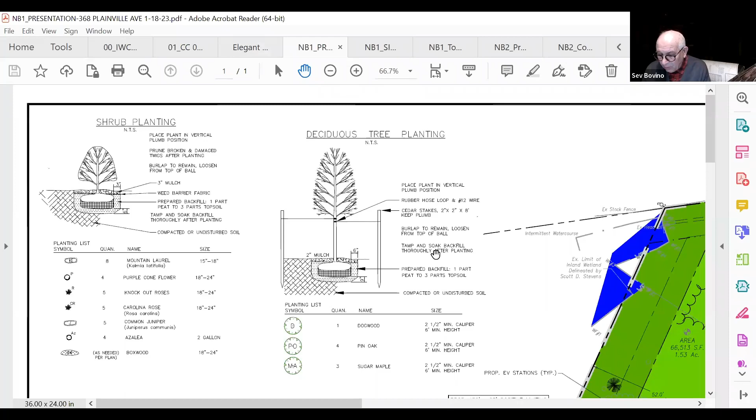Our proposed system takes the roof water from the building to the southwest corner of the detention area. The canopy drainage is directed to the southeast corner of the detention area. The pavement is pitched to allow sheet runoff to the south edge of the detention area, where a trench drain brings the flow to a Stormceptor. From the Stormceptor, the runoff is discharged into a sediment forebay with a stone berm. The runoff goes through the stone berm to the bottom of the detention area, which is about 1 foot deep at elevation 316.6. The spillway elevation is 317.5, and the top of the berm is 318.7.

So as you can see, it's a very shallow system. The runoff moves along the bottom of the detention area, which is covered with grass, a wetlands mix type of grass, to a control structure, the invert of which is 314. From there it drains to a flared end with a riprap energy dissipator, and eventually to the existing discharge point over a grass area for about 45 feet from the end of the riprap area.

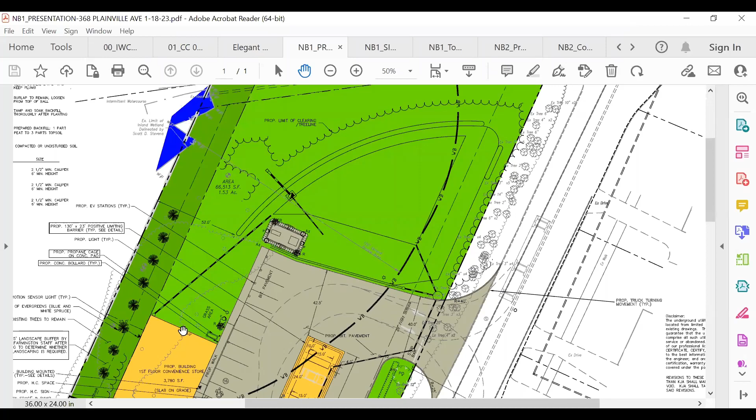From this flared end, we have an energy dissipator riprap area. From here to the edge of the wetlands is about 45 feet, and this is a grassed area, which is where the runoff eventually will end up. At the end of the existing 36-inch pipe here, we are proposing riprap intermediate as recommended by the commission at the last meeting, when the commission saw the condition of the pipe at the end of that pipe.

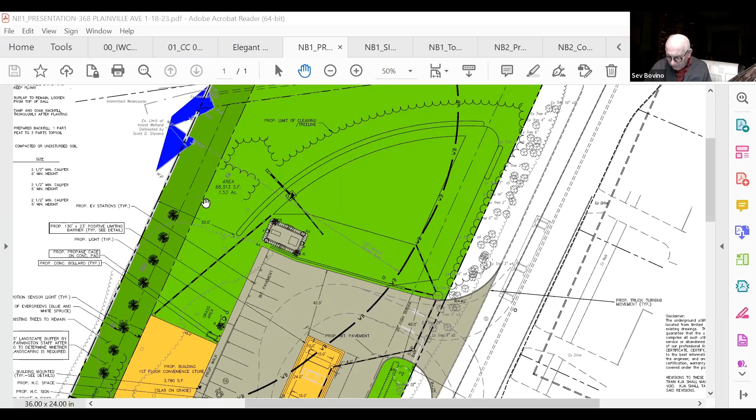At the meeting with DEP and Arcadis, it was confirmed that this does not create a problem, as the attorney Ziogas indicated, because the pollutants are south and southwest of this area, and the groundwater is most likely about 11 feet deep. The detention area is designed to hold storm events from the 2-year all the way up to and including the 100-year storm. All the notes and details are on the plan in terms of erosion controls, and notes regarding meetings to take place prior to any work being done on this property, and so forth.

So at this point, if you have any questions, I'll be glad to answer.

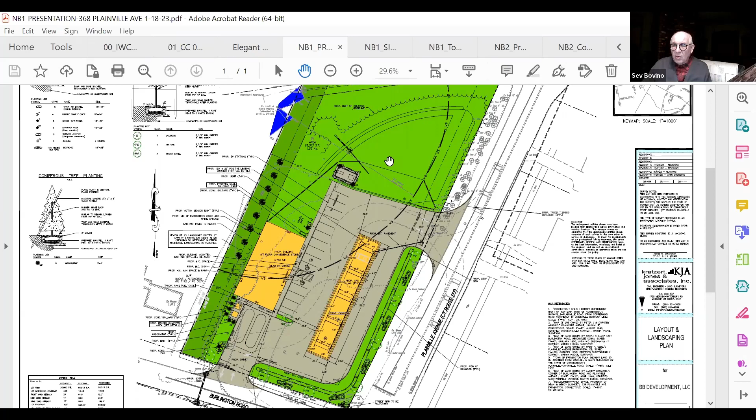Before I ask commission members, Ms. McManus, did you have anything that you wanted to add today too?

Good evening, Mr. Chair and Commissioners. No, I think Sev kind of took the floor tonight, unless you have any particular questions you'd like to ask. No, I just figured you started talking earlier, so I just asked you.

No, I don't see everybody on my screen, so I was hoping somebody was there for the applicant. So I got anxious, sorry.

All right, Ned, I'll start with you tonight. Any questions, comments, concerns? I wasn't sure how to, so most of this water is going to drain, the pavement is going to drain towards the north end of the lot, and you have this trench drain. Now, does the water go in that and then just go into the ground there, or does that connect up to the other system somehow?

It connects to the Stormceptor. Right, but then it looks like it's connected up to a pipe, so I wasn't sure which way this thing is draining. It's draining from the east to the west via trench first, then via pipe to the Stormceptor, and then out via pipe to the forebay in this area. So it drains through the trench itself, and what can't drain through the trench goes into that pipe and into the collector, into the forebay, then through the forebay stone berm, out to the control structure on the west side of the detention area, and then out to the energy dissipator to the west.

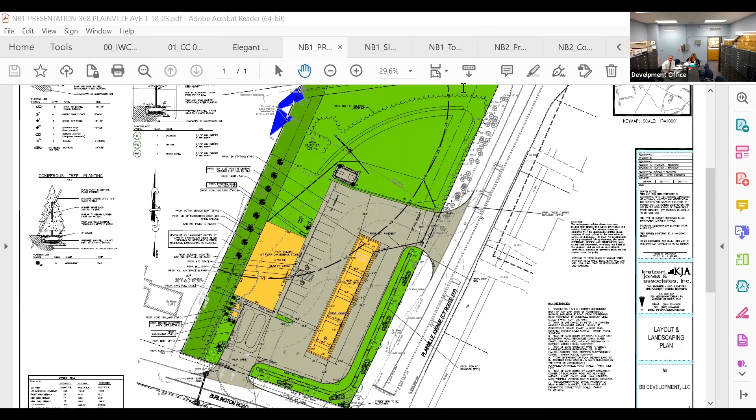The next item on the agenda is Bulwark LLC, lots 8120 and 8122 Colt Highway.

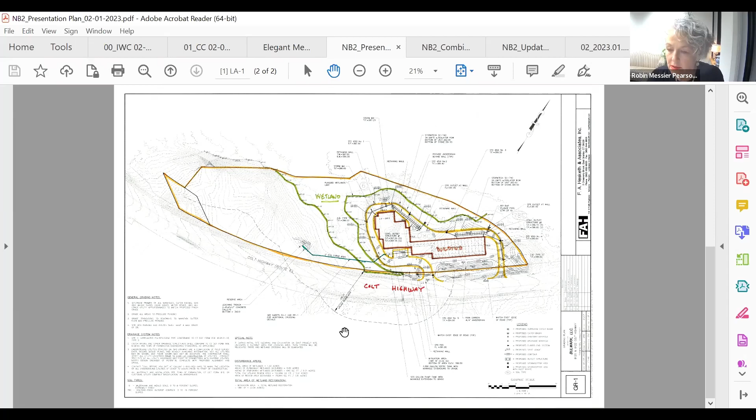Good evening, Mr. Chairman. Robin Pearson, here on behalf of the applicant, Bulwark LLC, requesting a permit to conduct regulated activities at the site. As this commission recalls, on October 19th of last year you denied an application for the same property requesting a wetland crossing that would have directly impacted the wetlands, allowing access so both sides of the site could be developed for a self-storage facility. On the eastern side, the larger of the four proposed buildings, about 59,000 square feet, was requested. The commission felt the applicant had not analyzed prudent and feasible alternatives to a degree that could give you comfort in a favorable review.

On the western side of the site, necessitating the connecting driveway crossing to avoid a second access on Route 6, three additional storage buildings were proposed. You therefore denied it and asked us to look at possible alternatives. In your denial letter, you asked us to look at five alternatives that would cause less or no environmental impact to the wetlands, and specified that one, more than one, or all of them might be followed to come up with a plan making you more comfortable and allowing a positive decision.

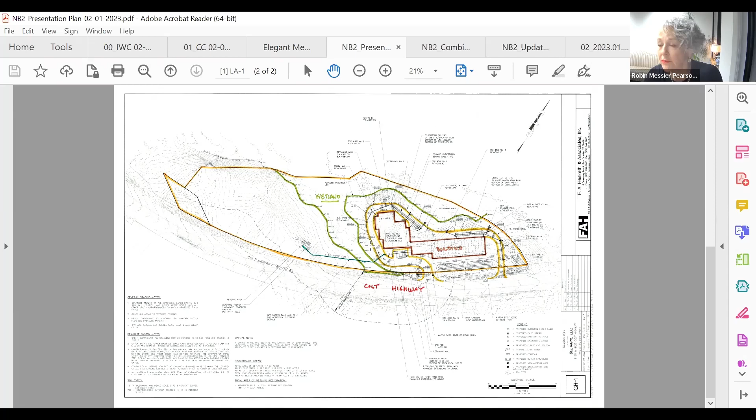And both item 4 and item 5 are really no longer relevant given the significant change we have made in totally redoing the plan to eliminate all the development on the western side and concentrating it on the eastern side in the single building that is now a little bit taller, but certainly in terms of its footprint and the impacts on wetlands, there has been a major reduction.

With me this evening is Dave Ziaks, who has designed the new layout for you, and also Anthony Zemba with Land Tech, who is our certified ecologist and soil scientist. He's also provided you with an updated impact assessment for your consideration. And because we are proposing the potential for a temporary disturbance, but I'm not going to get into the details of that, I'd like to turn it all over to both of those gentlemen to go through the specifics of the application.

And I think it's very clear that we heard what you had to say, and we worked very hard, and it took a while to be able to make it work, but we've come back with a plan that satisfies your concerns. So with that, David?

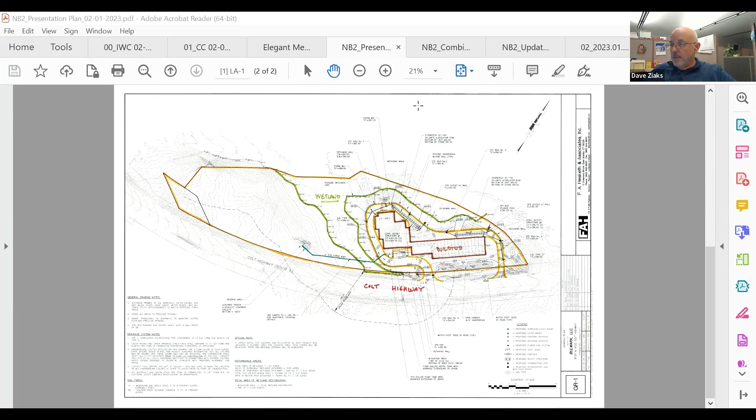The green line on this colored rendering is the wetlands limit that we've all had a chance to review and see in the field. It's about 1.02 acres of the overall 4.99 acres of the total site. It has a high point in the middle of the site where it tends to drain to the north in the northerly section, and then parts of it in the south end drain towards the 36-inch drainage culvert that goes under Colt Highway, which is a DOT drainage culvert. Most of the property falls within the 150-foot upland review area, so 3.51 acres of the 4.99 acres is within the regulated upland review area.

As Robin pointed out, we spent a great deal of time since we last met with you folks on the idea of converting the building that was previously proposed as 3 stories to possibly 4 stories. That has lots of challenges as far as building codes and zoning codes and things of that nature, and that's what we spent the last 90 days reviewing. The applicant has exhausted that and feels comfortable that they can build a 4-story building within the footprint that we previously proposed and still have an economically viable project.

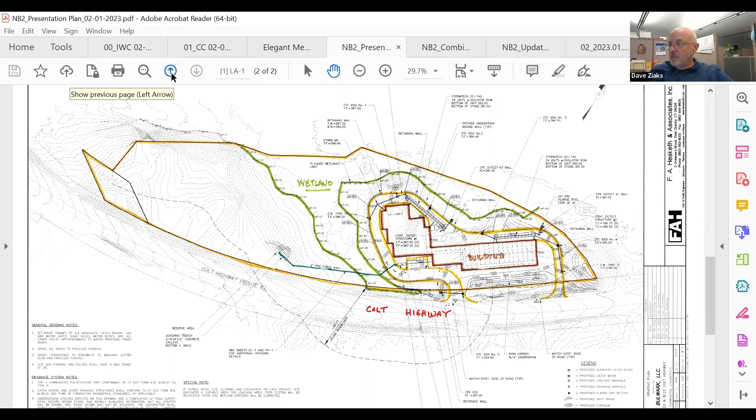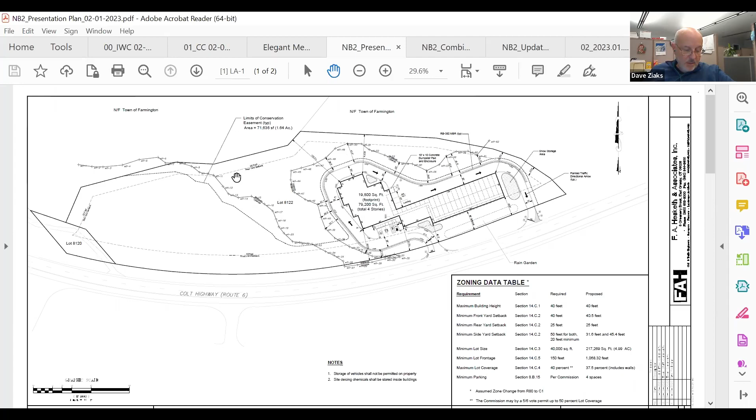So really, in summing it up, we've listened to what you had to say. It took a long time to convince ourselves that we could do it. And we've come up with a project that is economically viable for the applicant, concentrating on the east side, not the west side. We will be designating pretty much the same limits of a conservation easement incorporated in the plan that will obviously prevent any further encroachment towards the wetlands, and also ties in nicely with the town of Farmington's open space, which is all to the north, that we explored last time.

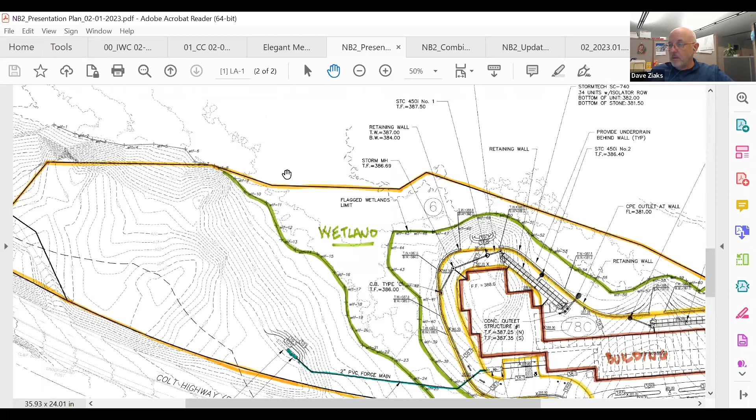I thought maybe we have Anthony say a few words, our soil scientist and wetlands expert. He provided, I think it's a 2-page updated letter to you folks that's now on the record, of his observations with the changes to the plans. Anthony?

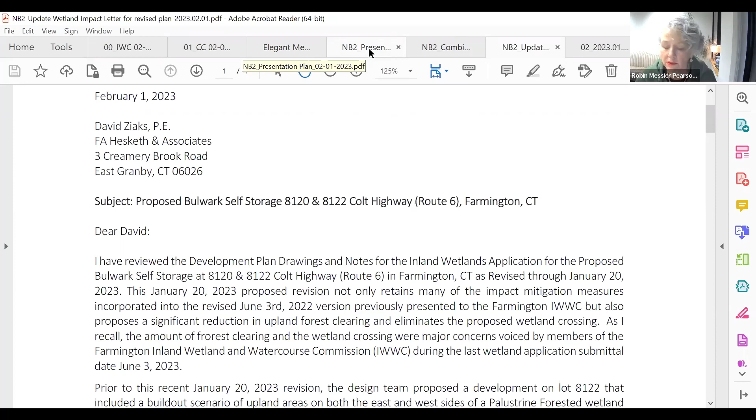The only thing I would like to say is that we don't think under the circumstances that there's really a need to hold another public hearing on this. You've already done a site walk. There was very little public concern about this. There was no public concern about the particular proposal.

And I think, Anthony, your update is very thorough. It was your opinion previously, and I gather it's fair to say that your opinion is even strengthened more by the current changes, that this will not have a negative impact on the wetland resources as currently designed. Correct. Thank you.

Okay, thank you. That's it, Mr. Chairman. Obviously you can't decide it tonight because you're receiving it, but I guess we just would request that we proceed to the next meeting without the need for having a public hearing. Okay, well, we will discuss it tonight so everybody will have a good idea. So Rich, I'll start with you. Any comments, questions, concerns?

And what's your feeling about significant or non-significant activity? Well, I feel it's a lot less impact than before, with the wetland crossing being eliminated. I'm happy to see that. There was a small, like 675 square feet direct wetland impact. Is that the temporary impact that we're talking about with the crossing for the septic system? That was a question I had in my mind. I think that was from my agenda review. Yeah, I just kind of blocked out a little area around that pipe.

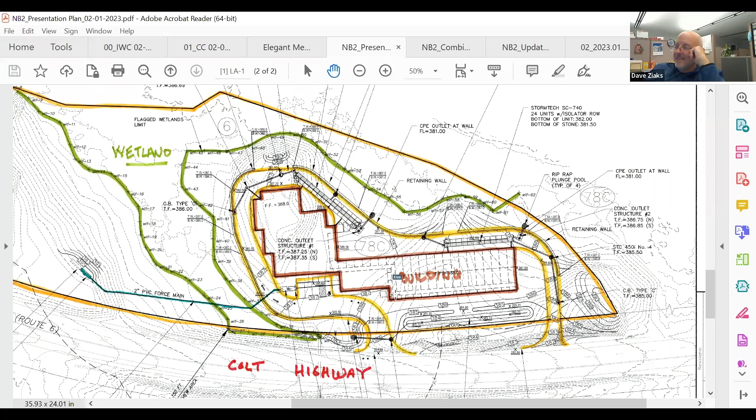I appreciate your answer. I thought it was the western side where more of the removal of material was going to be. So thank you for refreshing my memory, which, as my wife tells me, is not always that valid. My retention might not be that good. Thank you very much. Thank you. No problem. All right, thanks, Mark. Ned?

Yeah, I think before we voted on this, I would want to know the outcome of whether or not the 2-inch force main and the septic system can be relocated. I would want to know the final decision as to where it's going before I voted on this. And the other thing, this whole project is built right up to the edges of the wetlands, and that's one thing that always bothered me.

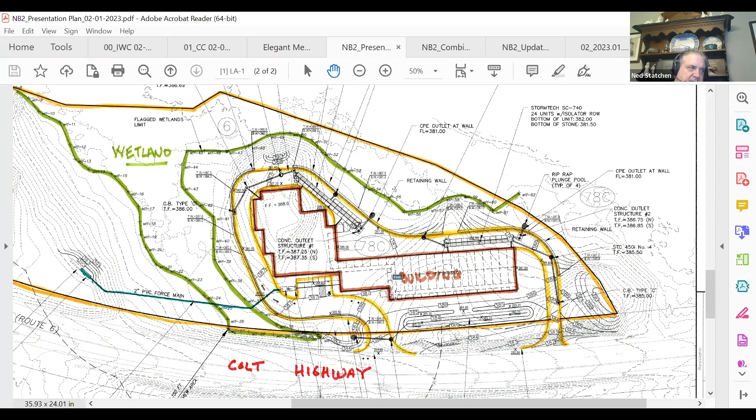But I noticed that the limits of the conservation easement on the west side weren't changed at all. So to me, that says, okay, they're going to build this and then come back in a few years and try again to build up on the other side. So since our intent was not to have anything built on the other side, I think we should ask for a conservation easement on the entire west side and put that to bed, so we don't have to worry about them coming back and trying to build on the west side again.

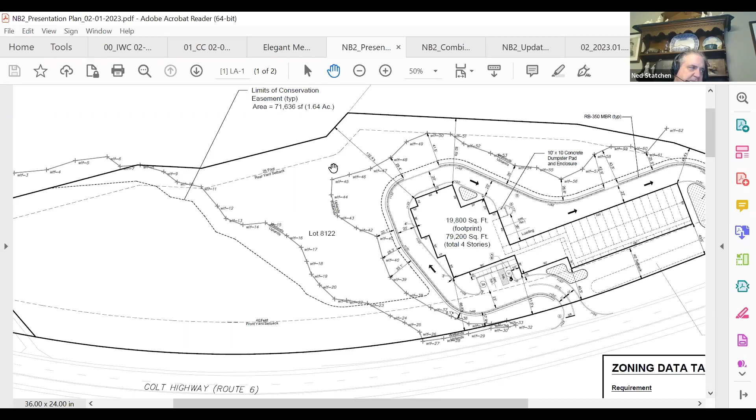I think that would be prudent and the best way to safeguard the property in the town of Farmington open space on the other side. I just think we can not have to worry about it in the future and know that the conservation easement is providing protection for that land. That's all I have. Okay, thanks, Ned.

I don't really have too much. I know you mentioned that you're still going to continue to do some of the remediation work for the sanitary sewer line. If I understood you correctly, it's going to take a while before you can figure out whether or not you can do something on the eastern side of the property. Is that correct? You'd have an answer in 2 weeks?

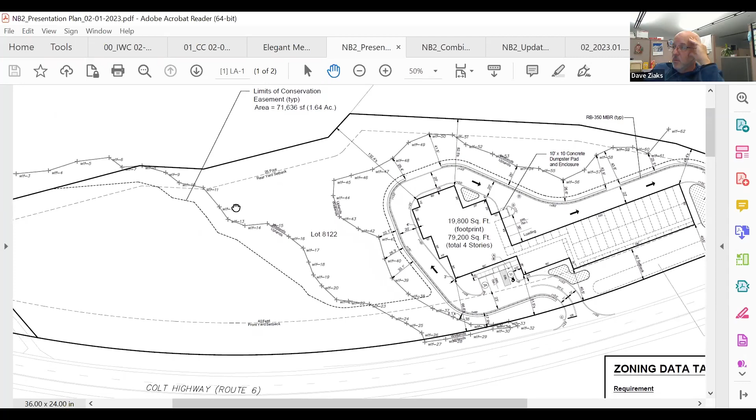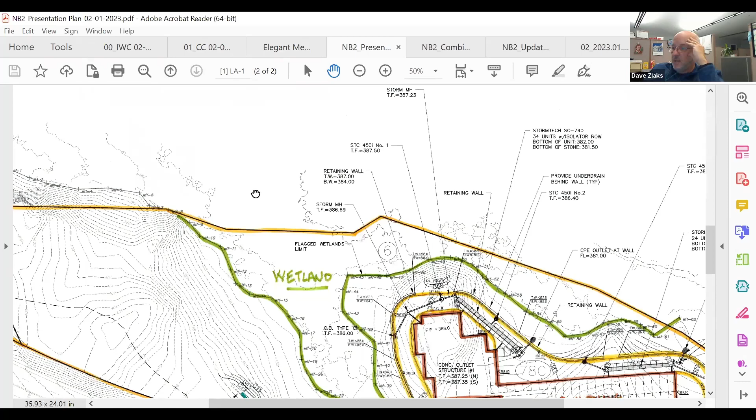No, the point is that we really won't know that until we've got the site down to sort of the pad elevation, and then what soils are left and would be acceptable to the Department of Health for us to put a leaching field in that location. So that's why I've left the leaching field going over to the west side as a potential necessity, if we're unsuccessful on the east side, rather than me showing something on the east side that I'm not 100% sure I can accomplish and then have to come back to the commission again.

I felt that this was the right way to approach it, but with the condition that we're not going to make any attempt to work temporarily across the wetlands to put that force main in until we've exhausted all the options on the east side, working with the health department and with staff. And if we manage to get it in on the east side, then there will not be any work at all related to that force main across the wetland. It will not be necessary.

But this is kind of a unique situation in that because of the reshaping of the site on the east side to create the pad site, I can't say with 100% certainty that I'm going to be able to find a small spot to meet all of the code requirements for a leaching field. As you know, there's an extensive list of separating distances and the like to pull that off. We're going to give it the old college try to put it over there.

Obviously, just from an expense point of view, who wants to deal with crossing the wetland and then building a force main and all that stuff? So from an expense point of view, it definitely forces us to exhaust the east side to the absolute maximum that we can. And I haven't thrown the towel in. I think I got a couple ideas where we might be able to put it, but I won't know until after that initial amount of construction takes place. And then we'll see what true soil conditions are left, and then we would put the system in that location.

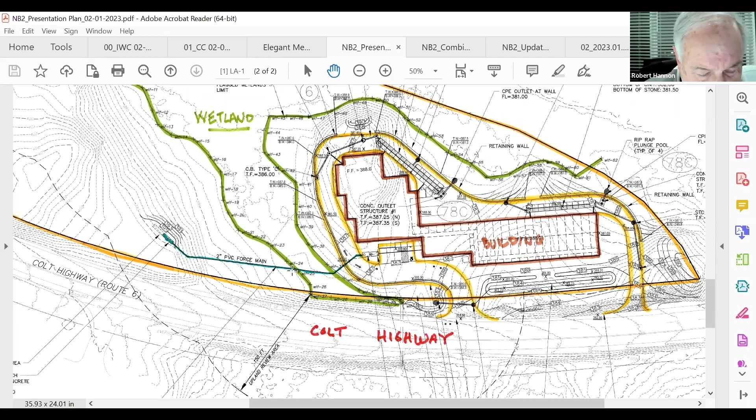Okay, and then the only other comment I have is I kind of agree with Commissioner Statchen in looking at that western part as a conservation area. Now, Bruce, I'm going to ask you on this because I know that with other conservation easements, property owners have been able to do certain things as long as it's specifically spelled out within the agreement. So for example, if that area was all put under a conservation easement, but the septic system had to go force main over onto that western part of the property, can that be incorporated into a conservation easement to allow them to go in and do the work they need to maintain and or repair?

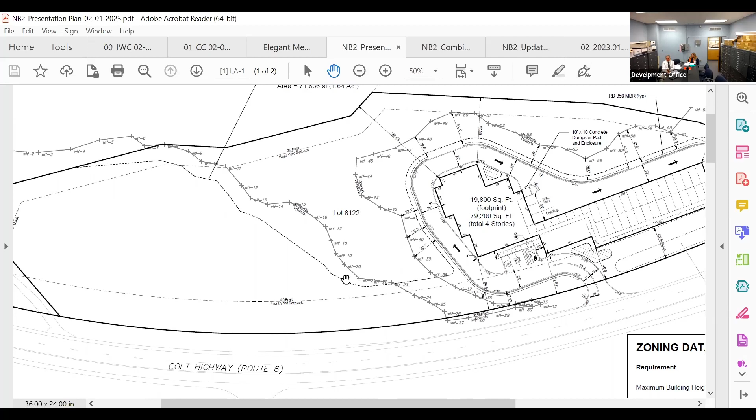You were inside my head. I was thinking the same thing. We have made revisions to our easements to allow continued maintenance of some kind of a utility line through there. So if the applicant was willing, we could take this easement all the way out to the road, or to the southerly property line, with a small caveat in the easement stating the perpetual right to maintain the septic system as approved in the approved plans.

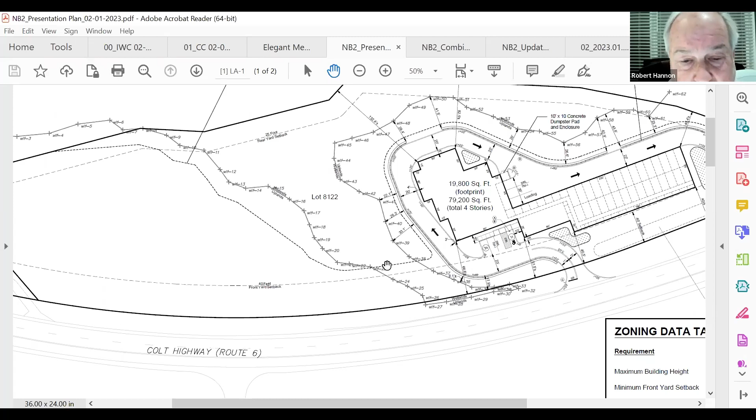Yeah, I just want to make sure that if this goes forward and they do have to cross the wetlands for the sanitary sewer line, they would have the ability to maintain the sanitary sewer system. Okay. Those are the only questions that I had. I will also say I do appreciate the work and the time that you put into this to try to consolidate everything on the eastern side of the property.

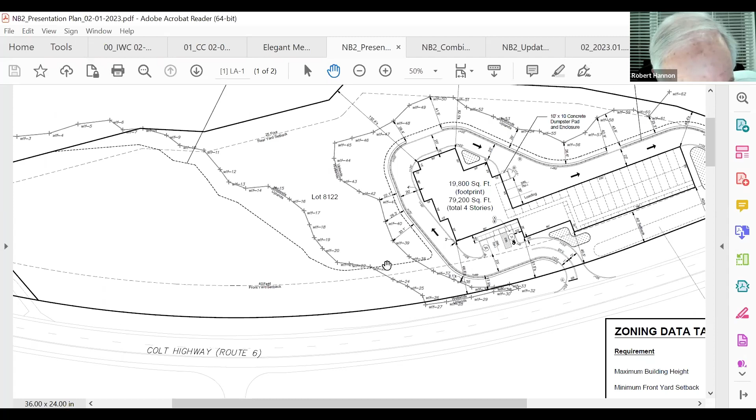So with that, first things first. Can I get a motion to accept the application? So moved, Mark. Is there a second? Second by Isner. Okay, so I have a motion on the floor to accept the application. All those in favor, please signify by saying aye. Aye. Aye. Opposed, abstaining. Okay, the second question was whether or not this would be a significant or non-significant activity.

In listening to what Commissioner Isner said, I agree with that. The rationale is to allow the applicant to work with planning staff to bulk up the application, identifying some of the initial issues so that's all part of the record. I think town staff and Attorney Pearson can work that out. Based on what you're saying, Attorney Pearson, the information can be incorporated, and I don't disagree with that position, but I'd just as soon hold off until the next meeting to render a decision on significant or non-significant, based on changes that can come in as part of the application, because we may not need to do it at that point if there's sufficient information.

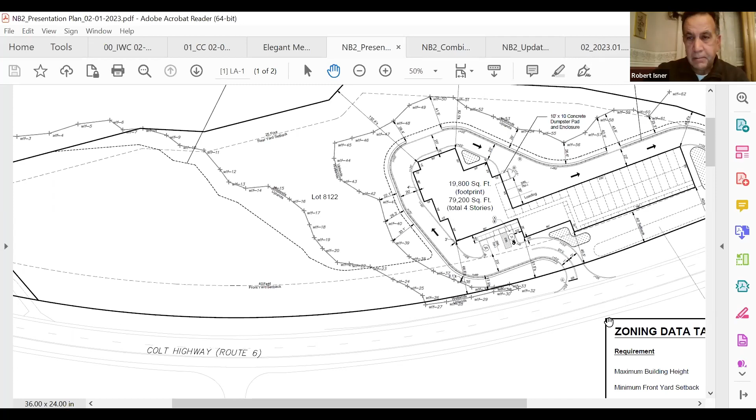Chairman, I just want to add a point of clarification. Most commissioners had weighed in that they thought it was a non-significant activity. That was the way I was leaning. My comment to wait on that decision was just to allow town staff additional time, since sometimes we don't spend as much time with the file. My initial reaction is it's probably a non-significant regulated activity, but I was hoping to give town staff a little more time. If there was something they picked up during their review, we could consider that before we make the decision. That was the reason I made the statement earlier.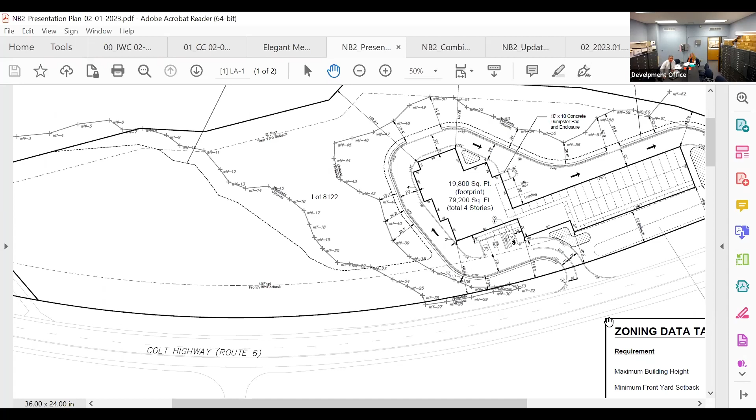Unfortunately, due to the timing of when we got this, I have not done a full review on it. I did do a side-by-side review, which I assume most of you have done as well, and like I said, not much is changing at all along this area. The only thing is they've tweaked this a little bit to get rid of the driveway crossing. So I don't see any major changes between this application and the previous one, if that helps, Commissioner.

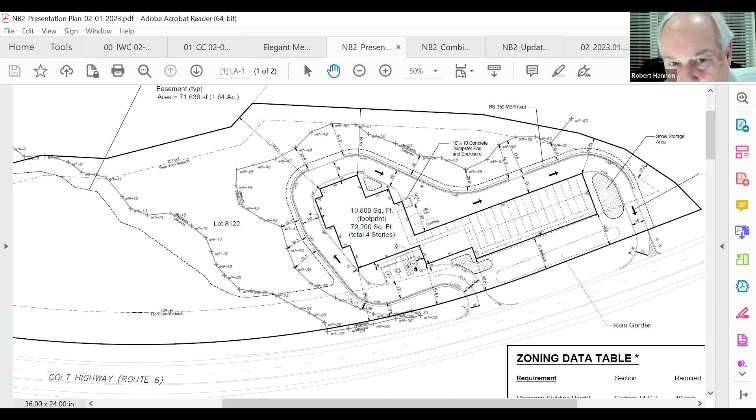One of the other things that may help is just to go on the record: I'm not inclined at this point to do a public hearing on this, so that's the direction I'm leaning as well, just so it's not a surprise. But I think what I'd like to do is wait until the next meeting. I think you have a pretty good understanding of where commission members are on this, but it's also an opportunity to give staff a little more time to dive into the application so everybody's on the same page.

Chair, Commissioner Berlanti has his hand raised as well. I'm sorry? Commissioner Berlanti has his hand raised as well. Okay, well, I didn't see him, oh there he is, way up at the top, okay. Rich?

The only concern I might have is the applicant mentioned they had a couple of ideas of where a septic system could potentially fit on the east side. That might be helpful, at least to show where the potential locations might be in the application, just so we have something to look at and get some sense of how successful that might be. Is that with the understanding that if actual field conditions don't allow for it, then we have the force main system that's currently proposed?

Yes, that's correct. It just kind of maps out our options, or the applicant's options, rather than not really knowing what they have in mind. Okay, but fully understanding that there is a potential that it may need to go to the west.

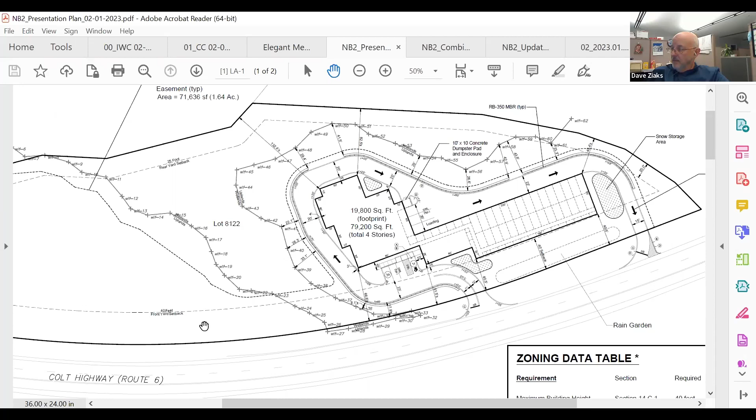Thank you, good evening. What's that, can't they send... Oh, did I just do something? No, they're signing off. Planners report? Hold on, the chiming's about... No, wow, I lost my thing, give me a second. Oh, where are we here? Why did I lose the screen? Okay, you see the agenda? Is it there? I see the agenda. Yeah, good. I thought I got lost for a second.

Next thing is planner's report, Apple Tree Lane. I uploaded a copy of a citation I sent to the owner. It was for 12,000 and change.

Also, as part of that, we required that they submit a plan to staff by February 22nd. The intent is to get that plan in front of you by the March 1st meeting, which would give us the whole month, two meetings to go back and forth, so they can start installation of the work by April 1st and have it done by May 31st. That was the plan we had sent over to them.

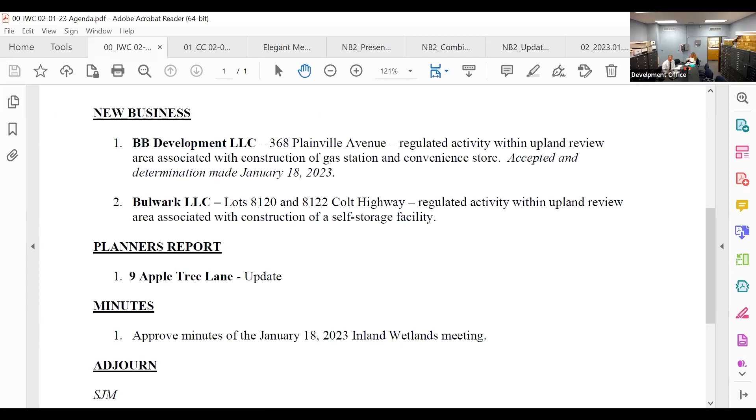How much was the fine? It was for 12 - did I put it in the agenda review? I didn't see it in the review. That's why I'm asking. No, it's right here, I'll show you. I thought I carried it over. It's in your package. I want to say it was $12,300 or something like that, but it was just over 12,000.

And that was based on a fine from 10 days after the cease and desist to when they actually started putting some of the hay down.

So do you think that letter spurred the hay being dispersed on the site? Pretty much, yep. And then I got an immediate phone call, so it worked. Okay, I bet you did.

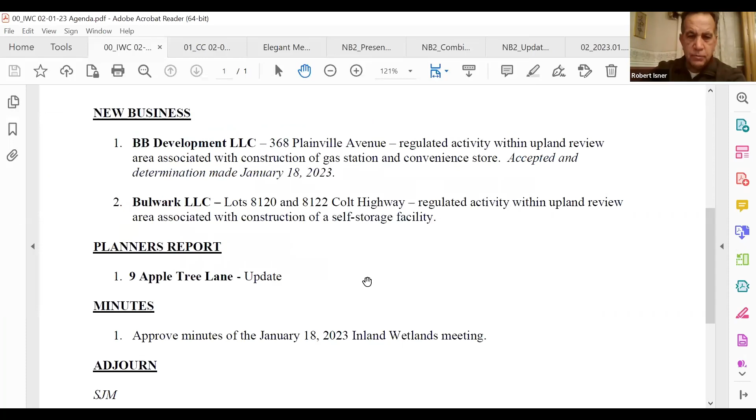On that matter, Bruce, they're allowed to continue construction work with the house, correct? They're not under a full cease and desist. At this point, I gave them a cease and desist until that hay was down - that was my important thing. I'm going to go out and do an inspection and check on the status, and once it's done, I will lift the cease and desist on the property just for work on the building itself.

Okay, because they've enclosed the house with plastic, I'm assuming, so that they can keep heat in, and the workers are going crazy there during the day. Are they? Last time I was there, I saw them putting on the hay. I didn't see anybody inside.

I know people that walk by the house on nice afternoons, and there's noise coming from inside. Yeah, because they've also submitted additional permit applications, and I have those on hold at this point.

If you do a drive-by, you'll see they've put heavy mil plastic all around the outside of the house. I'm assuming they pulled the windows and doors out and are using that to keep the work area warm. One time I drove by they were closing it up with some Tyvek, which I didn't have much of a problem with because they're trying to keep it from the weather. That's different. But any kind of continuing work, such as additions, is on hold. It's a full plastic shroud, like if you were doing an asbestos abatement.